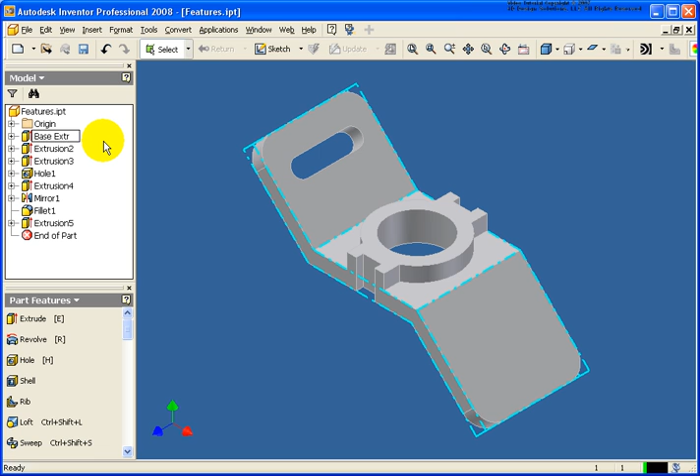So let's get started by renaming. There's two ways of doing a rename. I can come back into the browser and click in there slowly, just like you would in Windows Explorer. What I want to probably do is start giving these names so the person after me will know exactly what I meant by some of the operations.

So with extrusion 2, let's look at the second way of doing that. I'm going to right mouse click while the cursor is over that, and come back down and click on Properties. Again, we'll give it more of a descriptive name. So we'll just call it cylinder - definitely a little bit more descriptive than extrusion 1, extrusion 2.

Also, if you want, you can do the exact same thing for the sketch if you wanted to. Again, there's really probably no reason to do this, but you can if you want to. So let's bring that back up.

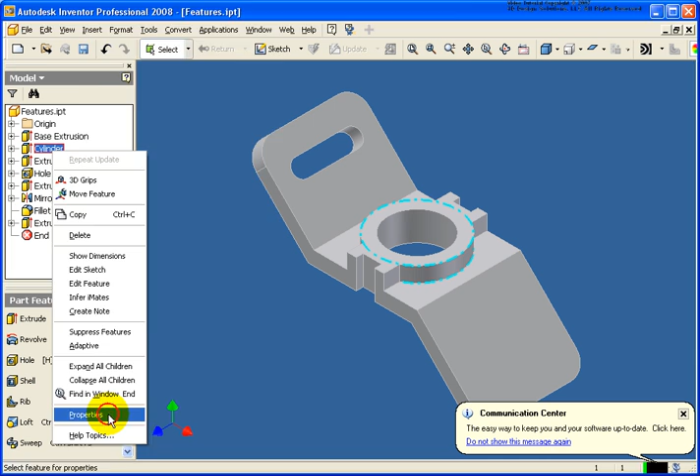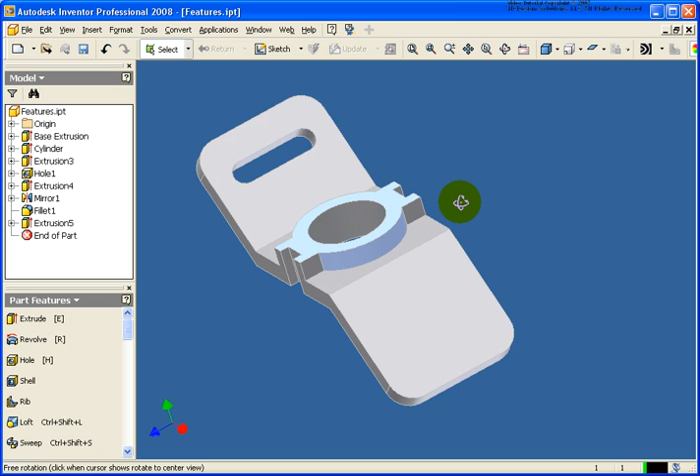So what I'd like to do next is go back and change the color of that cylinder. I'm going to move my cursor over it and right click, select Properties from the menu. From the feature color style, right now it says as part. From the drop down list, I can go back and change that - let's say blue pastel for the color - and the feature is changed. You'll see the other faces that are dependent on the other feature are not changed.

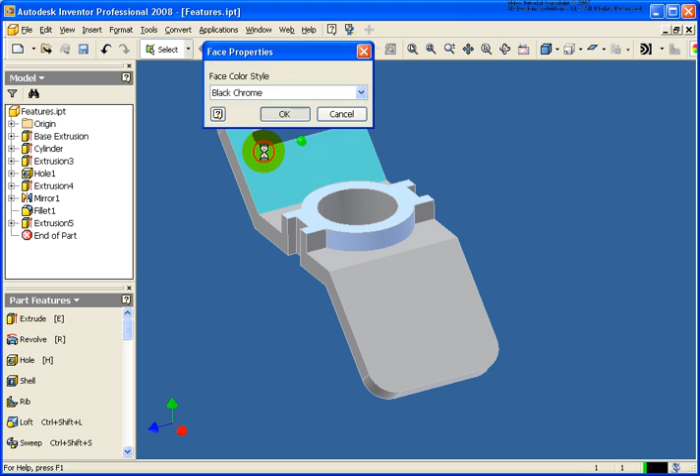You can also change the color of a face by simply moving your cursor over that face, right click, Properties, and again changing this one - let's say black chrome. Not appearing real great on the screen here, so I'll just switch that back. I'm going to change that back to as part.

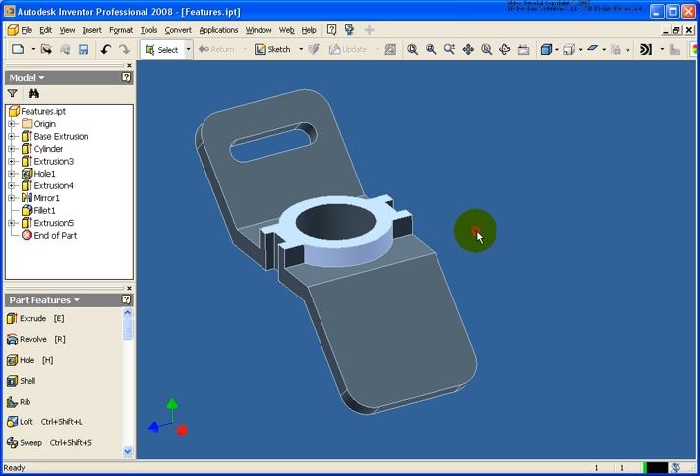Now, if I want to change the color of everything on this part, on the right-hand side of the standard toolbar it says as material. From this drop-down list, you can go back and select a given color. Now you'll notice the override that I did for the first feature has been maintained. So what I'll need to do if I want the entire part to be the same color is go back, right click, Properties, and change the color style back to as part, and everything is now consistent.

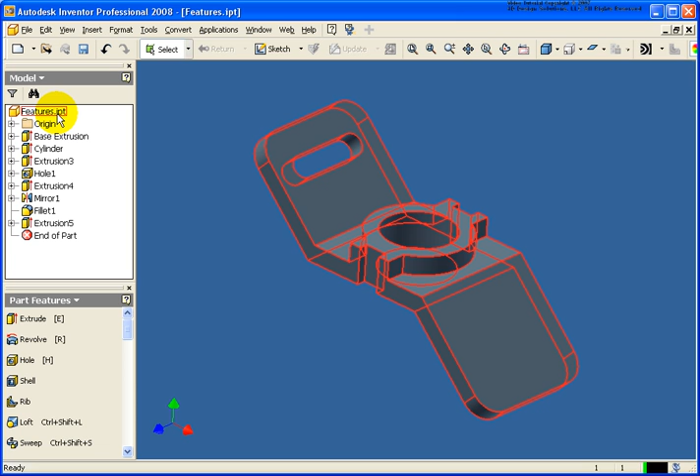Now the color override has no effect on the mass property information, for example the weight of this part. If I want to change the weight, just right click on the file's name in the browser or go under the File pull down and click iProperties. Then from the Physical tab, select the material that you would like from the drop down.

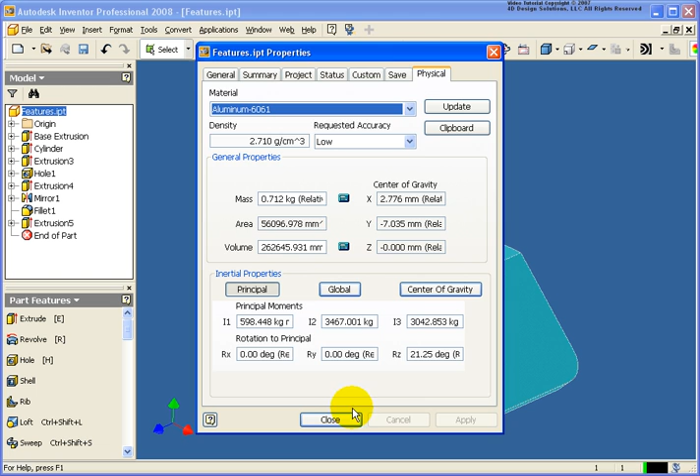So in this case, let's make it out of aluminum. Once we select the aluminum, the mass property information will update to reflect that. But you'll notice what didn't change is the color. So I would need to go back to the color drop-down and change that back to as material to update our style.

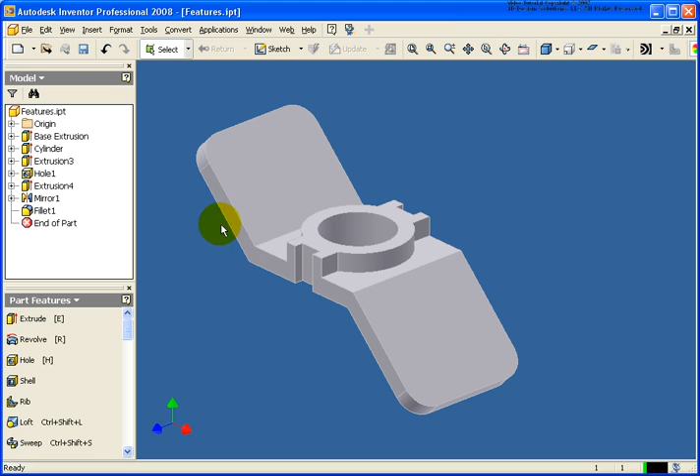Now let's take a look at deleting features. So to delete a feature, I can simply right-click on its name in the browser and select Delete from the menu. And it asks, do I want to delete the consumed sketch? If there are no dependent features on that, it'll get deleted.

If I came back here, for example, and deleted out the cylinder, it'll also delete all the dependencies that it has. But there's a slight issue that's happening with this now. You'll notice on the top portion of Inventor the red cross is now active, and in the browser I have the eye that tells me that there's something inconsistent here.

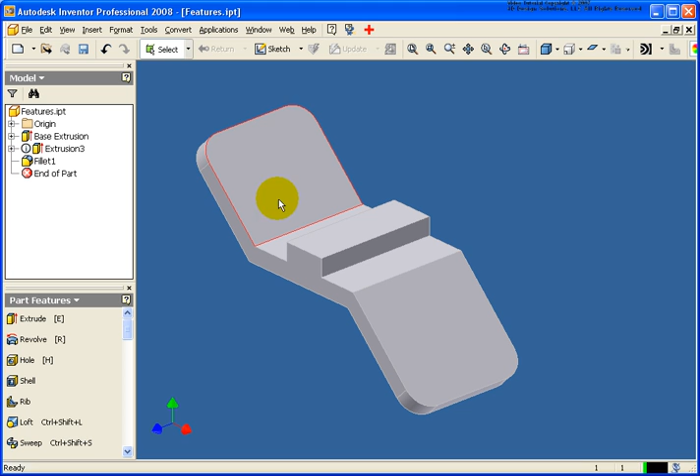Let's run through the recover option. I can unhighlight the issue here, and Inventor is going to suggest what I should do is edit that sketch. If I expand that extrusion 3, you'll see that Inventor took me right into that sketch.

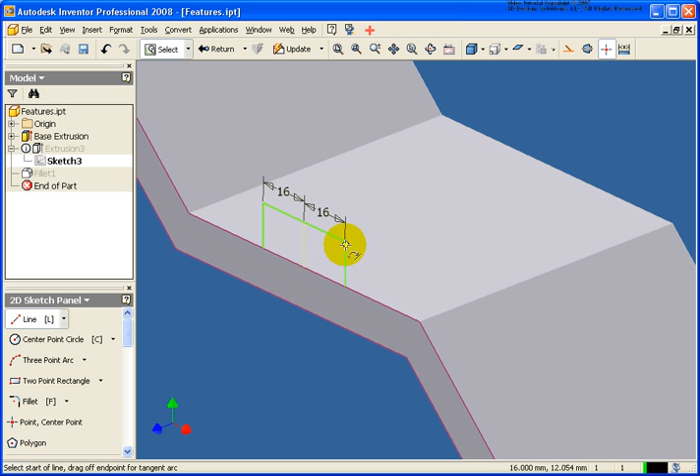I'm going to delete out that line because that line was actually developed from the cylinder, which of course was deleted. So I'm just going to replace that with a line. Update that - you'll notice that the red cross is gone, and so is the symbol inside the browser.

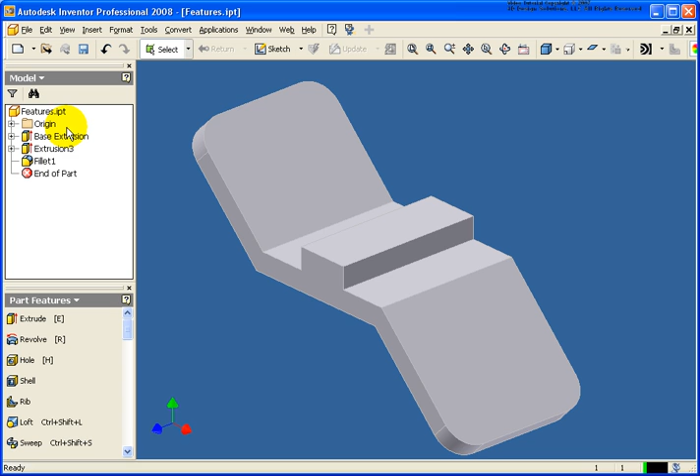So next, what I want to do is change the way that this part was developed here. So instead of doing an extrusion, I want to make a dramatic change. I'm going to delete the base extrusion, and what I want to do is create a revolve from that.

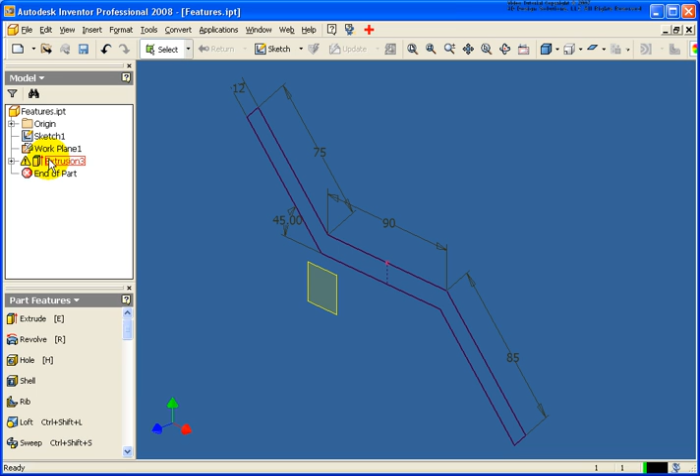So we have a couple different options here for the consumed sketches and features. If I uncheck both of those, you'll see what's happening is it left the plane that existed here and the original sketch. In this case, I don't need that work plane, so I'm also going to go ahead and delete that, and that secondary one. So now I'm left with the original sketch, and that's perfect - that's exactly what I want.

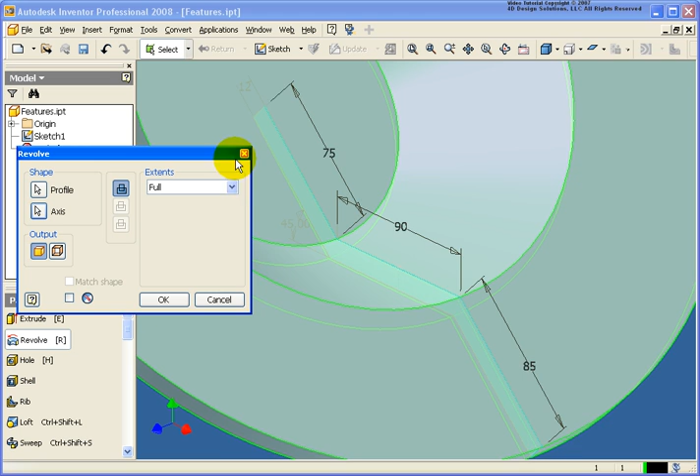So I'm going to change this to a revolve. For the axis, I'm going to select that outside line, and let's change it to an angle and change it to 180 degrees.